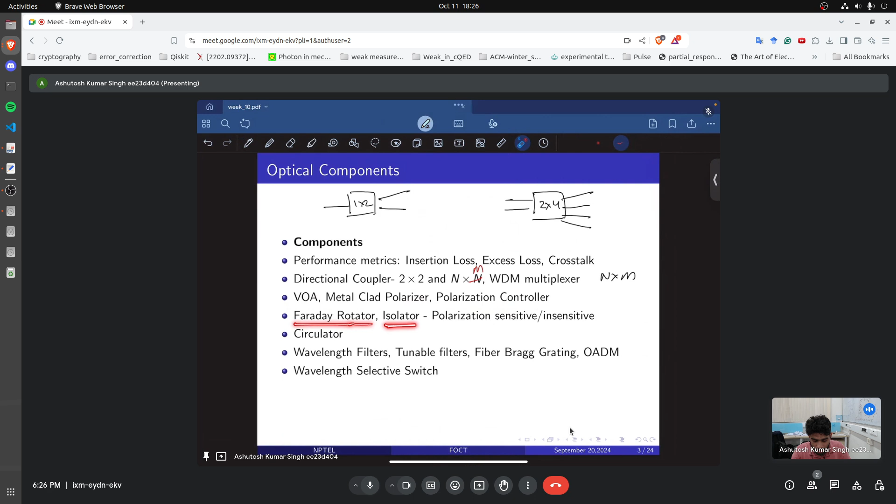Then we looked at how wavelength division multiplexing works. We looked at some other optical components such as the VOA, variable optical attenuator, which can be controlled electrically or mechanically. Then we looked at polarization components such as the metal clad polarizer and the polarization controller. We looked at Faraday rotators and how they are used in making isolators. Professor Deepa talked about both polarization sensitive and insensitive isolators. Then we looked at an important optical component called a circulator. Then there are different kinds of filters such as wavelength filters, tunable filters, and fiber Bragg gratings. OADMs are optical add drop multiplexers, in which you select a particular wavelength. Then we looked at wavelength selective switches, and she also talked about wave shapers.

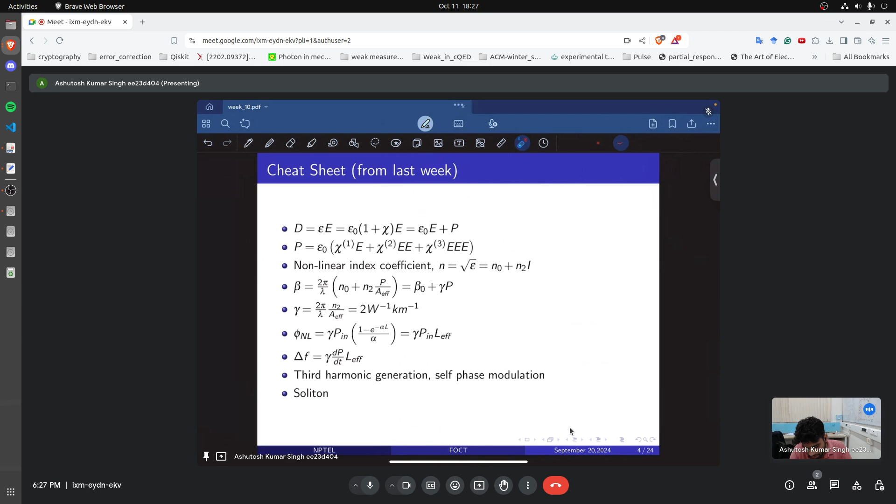Now for the sake of completion, I have added some of the formulas that we used last week. They have just been mentioned here, and we might be referring to them while solving the numericals. Among the formulas we dealt with this week is the formula for cross-phase modulation, the non-linear effect, where this is the chi3 term, because if you remember from last lecture, there is a linear term, the chi2 is absent because the fiber has cylindrical symmetry, and the next non-linear term present is the chi3 term. So we have the chi3 coefficient, and this is how the non-linear polarization looks for omega 1 and omega 2 launched into the fiber.

Then we looked at the four-wave mixing process. This is the phase matching condition for four-wave mixing. We looked at Brillouin scattering; as she mentioned in class, the frequencies are usually 11 gigahertz apart. And then we looked at Raman scattering, and these are the formulas that we'll be using in the numericals.

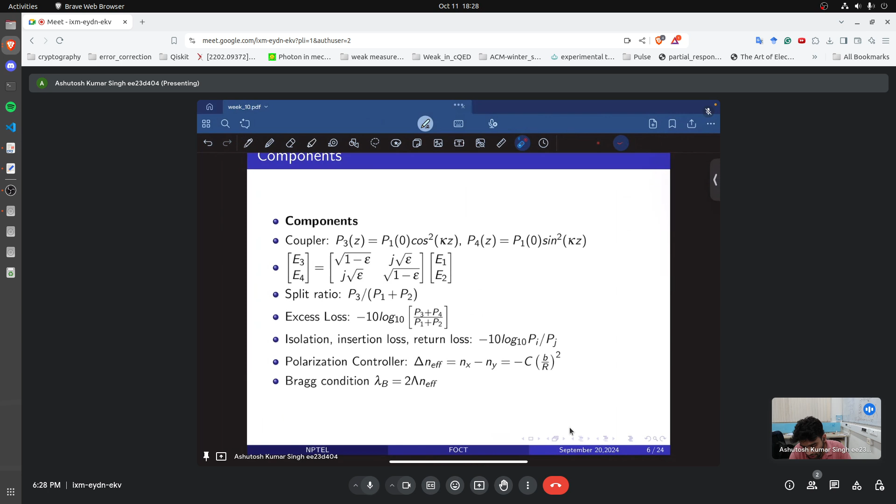Now, for formulas pertaining to the different components that are present, we looked at an optical coupler. If you remember, an optical coupler is just a 2x2 device: port 1, port 2, port 3, port 4. Actually, this is made as it was shown in the slide: you have this fiber going here, and then this is your effective interaction length, and depending on how long this is, the ratios are dependent, and the power at port 3 and port 4 are dependent, given by this formula, and this is the electric field matrix that relates the input to the output.

Now the split ratio is decided by P3 divided by P1 plus P2. Excess loss is the loss in the component that is just because of the material imperfections that are there. And the insertion loss is the ratio of the output power with respect to the input power. The negative sign is there just because Pj is always lower than Pi.

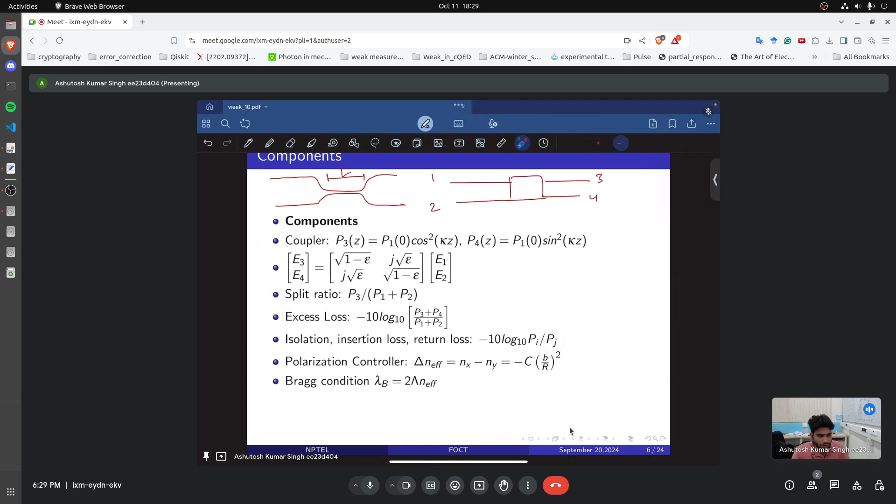And then we looked at how the polarization controller is made by having 3 circular hoops: lambda by 4, lambda by 2, lambda by 4. So with the help of these circular things, we are making a quarter wave plate, a half wave plate, and then a quarter wave plate. We looked at the Bragg condition, which is used in the fiber Bragg gratings after that.

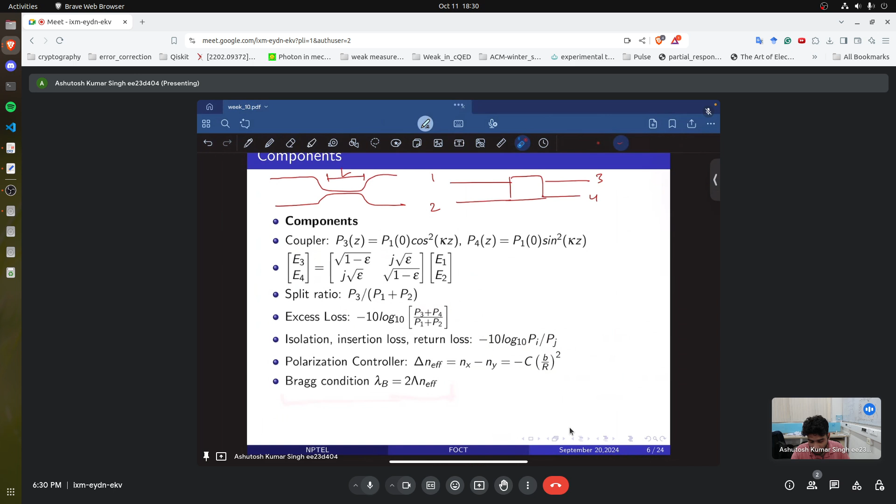Now let us pay attention to the first question that we have from the assignment. The question goes something like: given gR is 1 × 10^-13 meter per watt, and gSBS, SBS is stimulated Brillouin scattering, for a length of 80 kilometers, alpha of 0.2 dB per kilometer at 1550 nm, the SRS threshold is? Now R is Raman, B is Brillouin there.

So now to solve this question, we will have to first take the coefficient which is given in alpha. The loss coefficient is 0.2 dB per kilometer. We have to bring it in the linear scale, and if you remember from the last week, we had 0.2 into 0.23 per kilometer. Let me just pull out my calculator. This would be equal to 0.046 per kilometer. Now from this, we'll try to find the effective length of the fiber, which is given by the formula L effective. Here alpha is the loss, L is the length of the fiber.

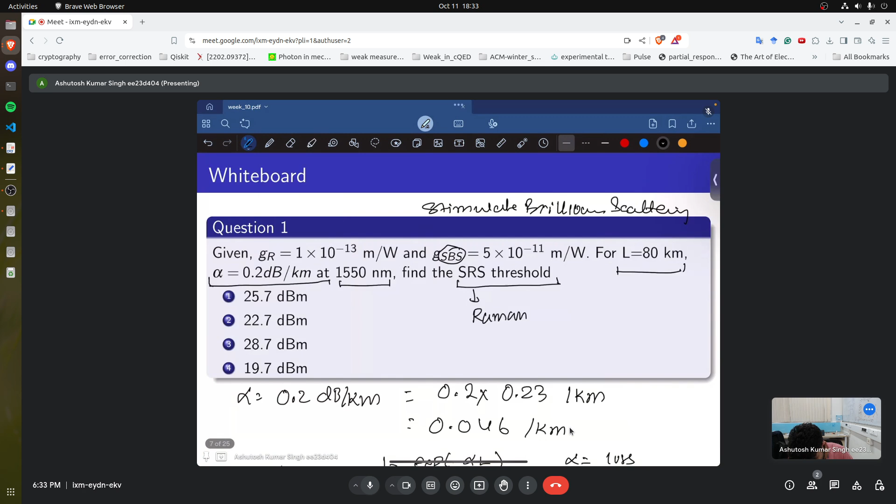Now SRS threshold, if you write it for this, P threshold is given by 16 A effective by gR L effective. Now we still do not know what A effective is. A effective for a single mode 1550 nanometer fiber is about 50 micrometer square. So here, if we just substitute all of these values, the value of gR, 1 × 10^-13.

Let us quickly do this. We are left with 10 raised to the power minus 1, so this becomes 10 raised to the power 2. And the value that we'll get will be 0.377 watts or 377 milliwatts.

Now if I want to convert 377 milliwatts into dBm, P SRS threshold would be 10 log of 377 milliwatts divided by 1 milliwatt, which is 25.76 dBm.

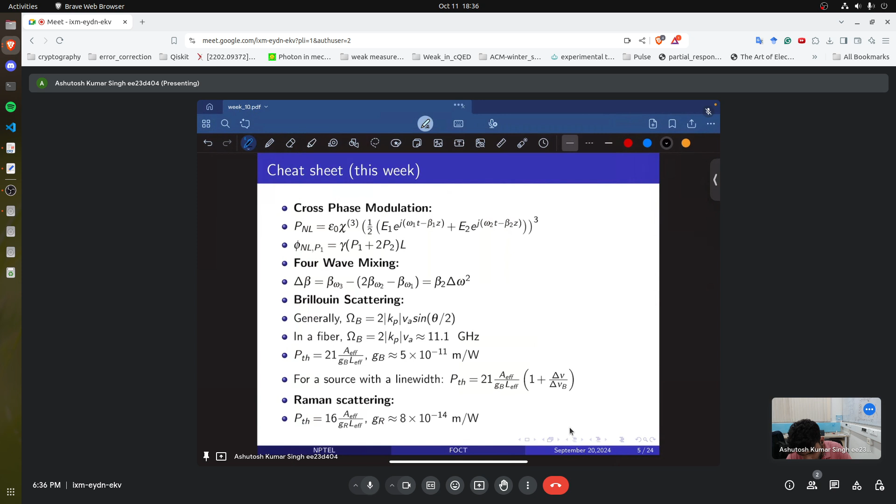Now let us look at the second question. The second question is very similar to the first one, where we have to find the SBS threshold, and B here corresponds to Brillouin. Now to solve this question, we again go back to our formula cheat sheet that was created for us in the slide, and we look at it. For SBS, the factors change slightly, so it is 21 area effective by gB L effective. So let us go back here. So the formula to be used slightly changes.

And we go to the P SBS threshold. This is given by 21 A effective by g. Because we are doing SBS, that's the coefficient that will come here, and this is the same L effective. So 21 into 50 micrometer square. Now g SBS, if we go back to the question, is given as 5 into 10 raised to the minus 11 meter per watt. So we have 5 into 10 raised to the minus 11, and the L effective that we had calculated was 21.2 kilometers.

If we solve all of this, we're left with 21 into 50. Now this is because micrometer is 10 raised to the power minus 6, square is 10 raised to the power minus 12. That is why here instead of 10 raised to the power minus 6 I am writing 10 raised to the power minus 12, and that is divided by 5 into 10 raised to the power minus 11 into 21.2 into 10 raised to the power 3.

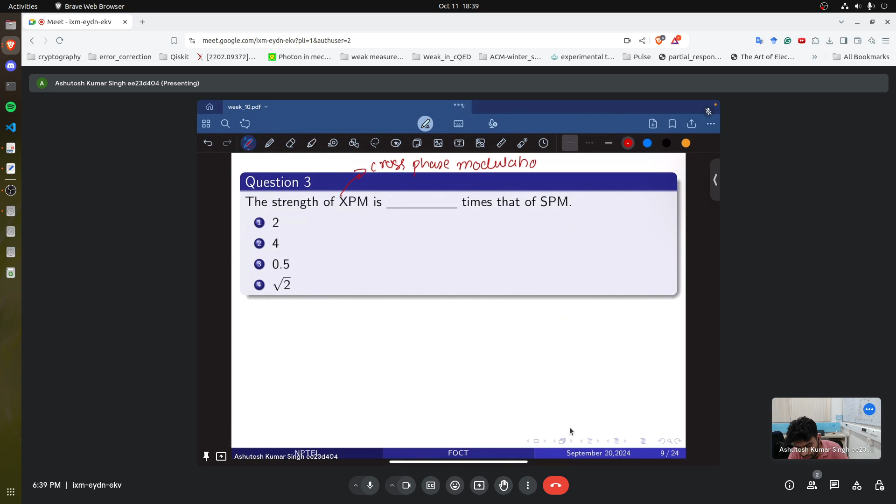The next question is, in this week we had studied, the X here represents the cross, so this is the cross phase modulation, and this is the self phase modulation. Now the question is asking the strength of X phase modulation is how many times the self phase modulation. So the first question is, is it greater or is it lower? You remember that the self phase modulation was one wavelength moving into the box, and then because of the changing intensity inside and the changing refractive index, the behavior was changing.

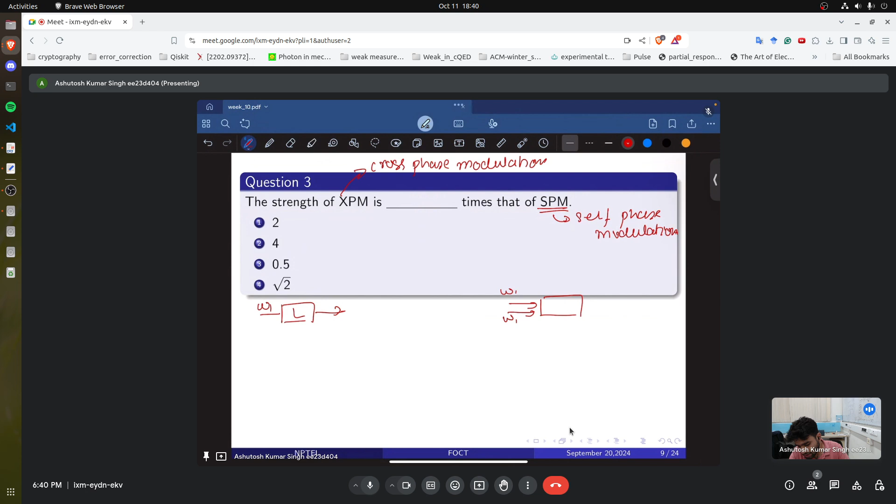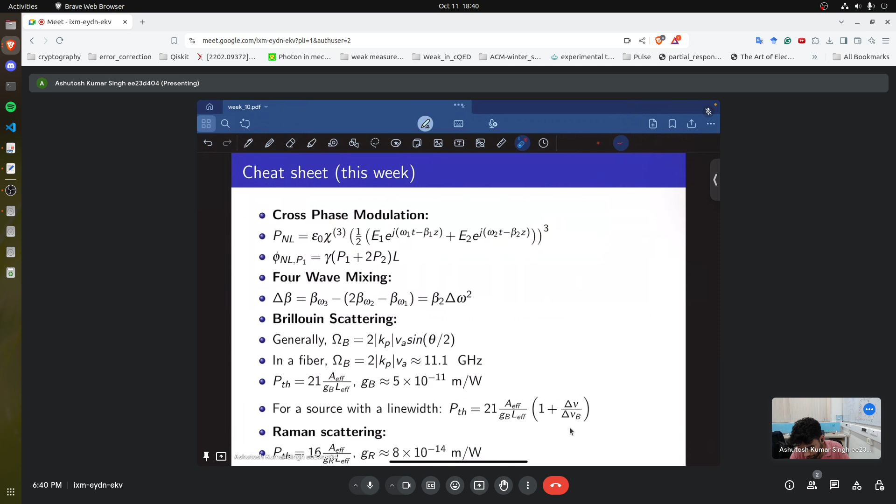But for cross phase modulation, we were inputting two wavelengths, omega 1 and omega 2, and then whatever was happening inside this box. This is captured here in the notes by the formula for cross phase modulation. You will see here that we have omega 1 and omega 2, two lights coming in. This is a cube of it because this is the third order factor. Now when you expand that third order factor, it is a normal algebraic exercise where you do a plus b whole cube,

and then you will be left with terms such as 3 E1 square E1 e raised to the power j omega 1 t minus beta 1 z, and there would be a second term, shown in Professor Deepa's slides as well, where there is 6 E2 square E1 e raised to the power j omega 1 t minus beta 1 z. So the frequency omega 1 is being affected by the electric field of the first and the electric field of the second, and you see that the ratio here is 2 times. So the strength is twice that of the SPM.

Now let us look at the next question. A coupler is to be constructed from two fibers by fusing. This is the same exercise where two fibers were brought together and twisted such that some overlap was happening between the electric fields. Given the coupling coefficient K of 2 per meter, what is the minimum coupling length required for the coupling ratio of 50-50? You have P1, P2, P3, P4. K is given to us as 2 per meter. What is the coupling ratio?

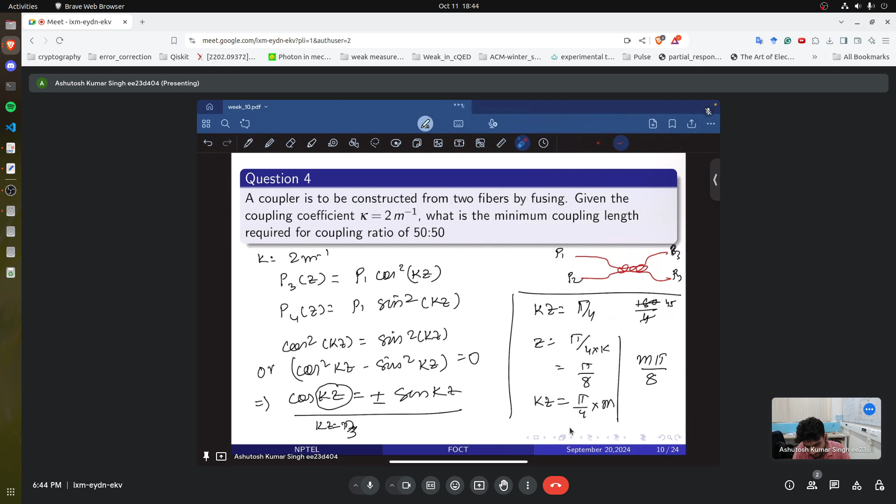Now the fifth question is, which one of the below components can be used as a WDM demultiplexer to extract a single channel? So WDM here is wavelength division multiplexer. Now before we get into that, WDM is further classified into two kinds, the first is dense wavelength division multiplexing.

And in this, the channels are separated by 50 gigahertz band, and this is defined by the ITU grid, and this is what Professor Deepa was talking about. It starts somewhere from 1530 to 1570 nanometer, and there are 80 channels. So 80 channels are there in DWDM. There is another type which is coarse wavelength division multiplexing. This is DWDM and this is CWDM.

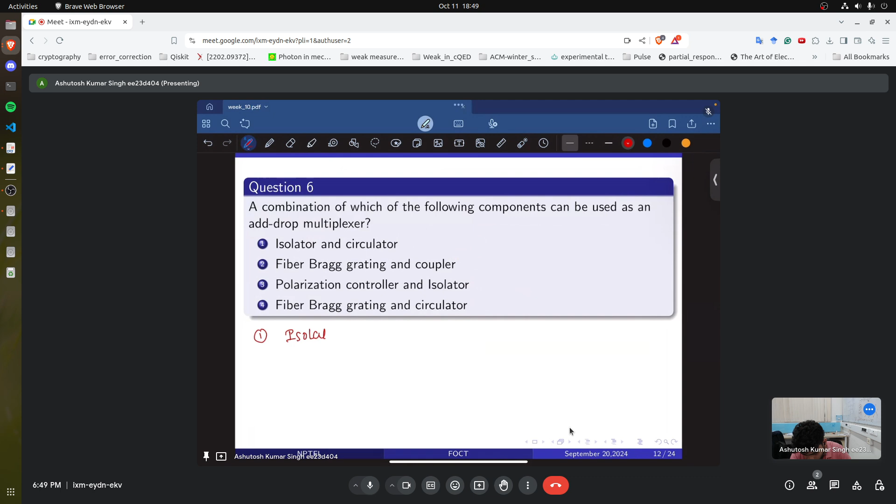Isolator allows for unidirectional flow of light. So clearly this cannot function as an add-drop multiplexer, because even if we come up with a clever scheme to drop something, we cannot add it back into the network. That means, let's say I have a network here and I am a user. Let's say I put an isolator here and then some complicated scheme of circulator.

I put a circulator here and then let's say I put an isolator. So whatever is going here from port 1, it will go to port 2 and it will go forward, but whatever is coming back, the isolator will not allow it. So this is clearly not the answer.

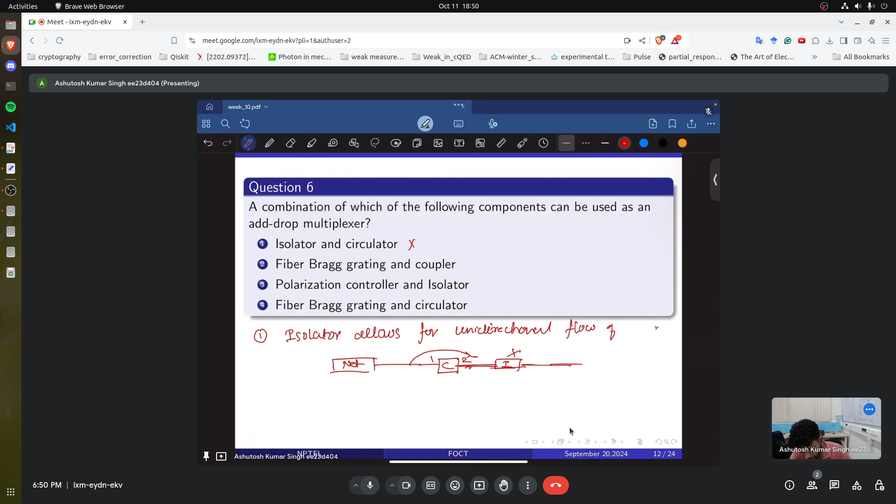Now let us look at fiber Bragg grating. So we had discussed what a fiber Bragg grating was. It was just a strip of fiber and certain sections of it were illuminated by different lights, so the refractive index was changing periodically. And because of this feature, if you feed a wide enough spectrum to this, on the output you'll have the spectrum and then a narrow part of it, depending on the Bragg grating, is reflected.

So this is input and this is transmitted, and what is reflected would be something like this. Hold on, sorry. What is reflected would be something like this. The combination of these two graphs would complete this graph, barring the insertion loss. So it does look like the fiber Bragg grating is the component that will help us drop and add the channel, and there is no sense of directionality here.

But the problem is a coupler is not the right solution. So let's say I have an FBG. I will draw this as fiber Bragg grating. Let's say I put a coupler, a 2x2 coupler, and I've put an FBG. Whatever is going this way, I'll be able to have it. This will reflect a certain wavelength and it will come here, but it is not going in the forward channel.

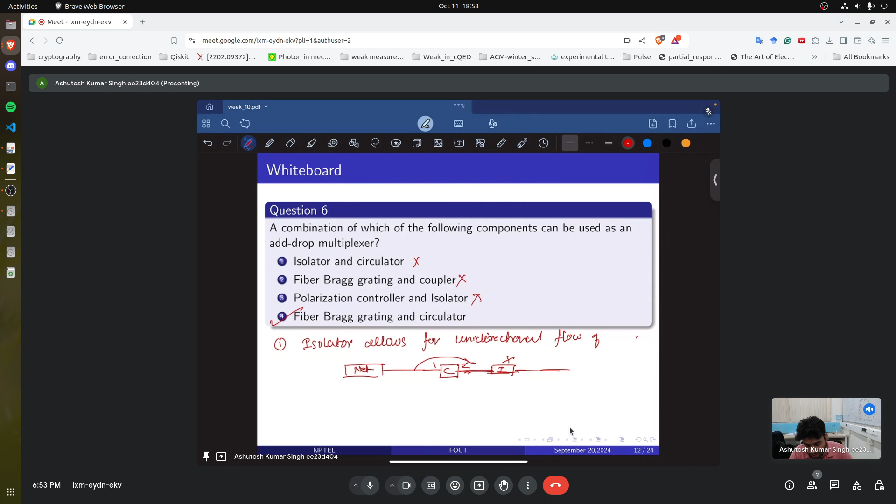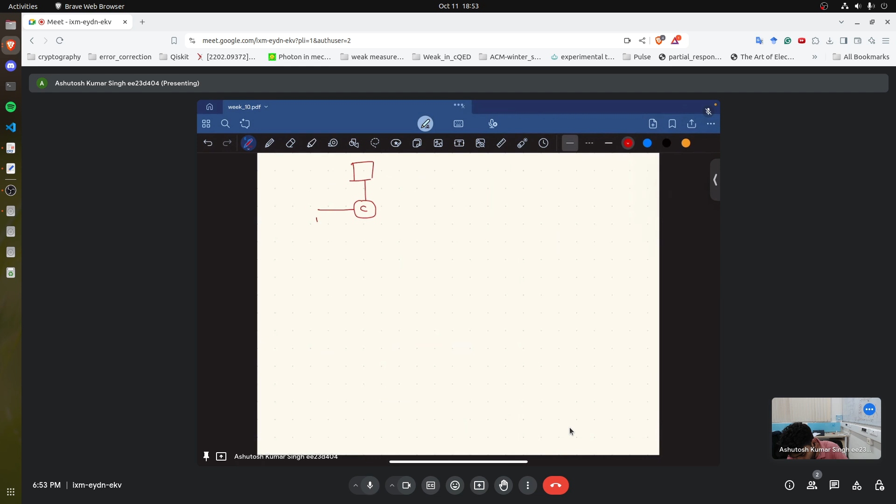So by elimination, we know that this would be the answer, but let us see how this can be constructed. Let us say I have a circulator, port 1, I put the FBG here, and this will be port 3, this will be port 2. Now let us inspect what is happening. This is lambda, this is power, and it's a wide spectrum that is input in port 1. At the fiber Bragg grating it will take this entire thing and then transmit this part of it, and it will reflect this.

Now what happens to this reflected thing? This goes here, and remember, reflected goes here. So in this way, if we had a fiber line, and I put a circulator here, ports 1, 2, 3, and there was an FBG in this case, and this went on, and this was 3.

So if TX was transmitting a wide wavelength, the entire thing will go from 1 to 2 at the FBG. This will transmit the entire thing, dropping a wavelength, and whatever is reflected here will come in. And in this way, we will be able to add or drop one wavelength. So the correct answer is the fourth one. Now let us look at question number 7.

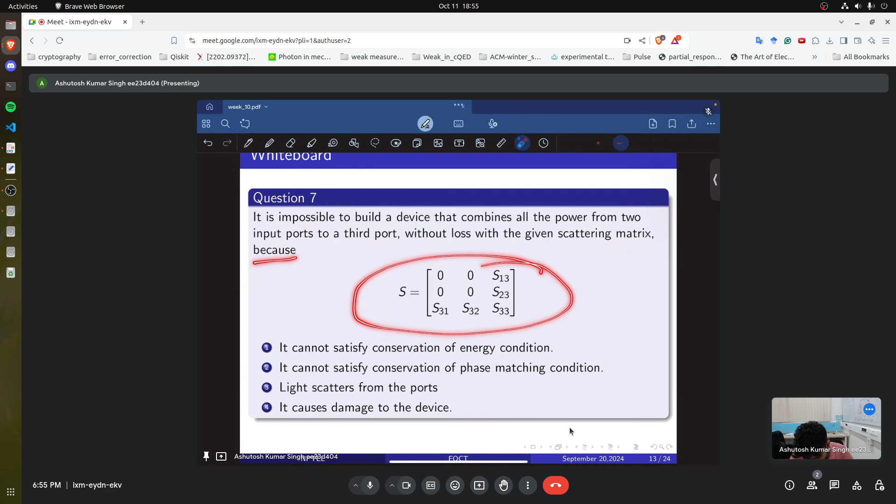Question number 7 is: it is impossible to build a device that combines all power from 2 input ports to the third port without loss with the given scattering matrix. We have been given this matrix, and it is asking for a reason. So whenever the scattering matrix is given, think of it this way. If we are assuming no loss, that would mean the scattering matrix multiplied by its adjoint should give me the identity.

So if I have S given here, which is given by 0 0 S13, 0 0 S23, S31 S32 S33. Now what energy conservation essentially means is that S S dagger should be identity,

and if I have these matrices written out, and the complex conjugates of these numbers, now if I just carry out the multiplication here. How do you multiply matrices? Row and column, row and column. These would give me the first element. So this would be S3.

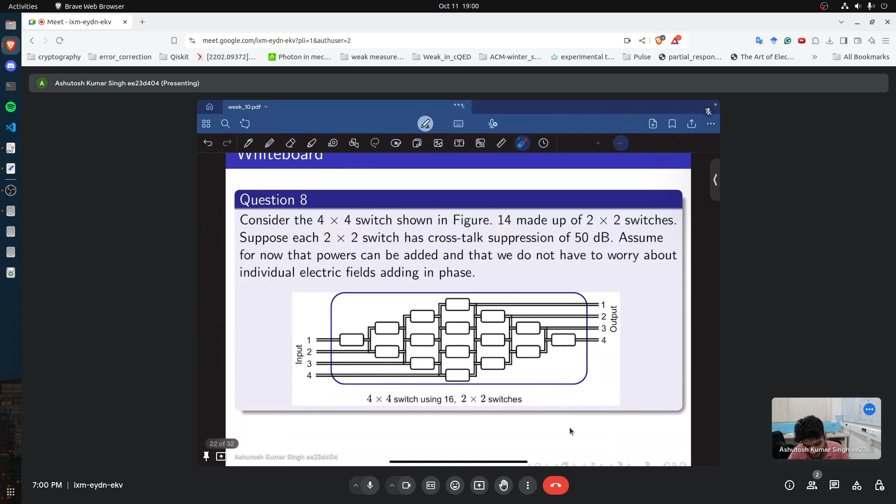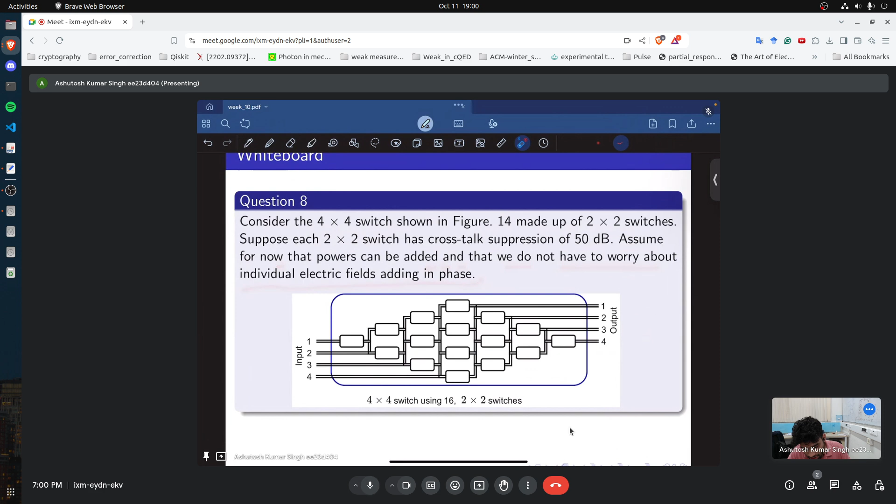Now let us look at the next question. Consider a 4 cross 4 switch shown in figure 14, made up of 2 cross 2 switches. Suppose each 2 cross 2 switch has a crosstalk suppression of 50 dB. Assume for now that powers can be added and that we do not have to worry about individual electric fields adding in phase. Because we do not have to assume that, this makes our life very simple.

Now we have a 4 cross 4 switch with a crosstalk suppression of 50 dB. What is 50 dB in the linear scale? 50 dB is 10 log P out by P in, and because this is suppression, it comes with a negative sign, which essentially means 10 raised to the power minus 5. So the leakage from each channel into the other is 10 raised to the power minus 5.

That means if you have 1 2 3 4 and 2 3 4, if light is going on in this, 10 raised to the power minus 5 from each will be coming here. If this is happening in all 4 cases, 1 would be the correct one, because I do not assume any leakage there. So let us take this specific line as an example. If this leakage is present in all the circuits, the incorrect optical power getting there would be 3 into 10 raised to the power minus 5.

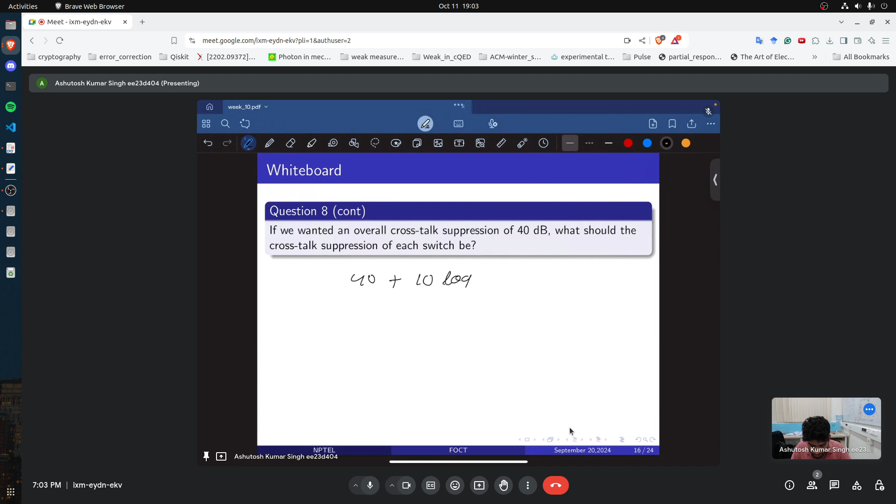If you want an overall crosstalk suppression of 40 dB, what should be the crosstalk suppression of each switch? We know there would be a degradation of 10 log 3, and this gives us 44.7 dB. So if we want an overall suppression of 40 dB, we only need a crosstalk suppression of 44.7 dB for each switch instead of the 50 shown in the previous case.

Now let us look at the next question that we have in our line: a product sheet for a 2x2 single mode biconical tapered coupler. This is the kind of coupler that we have talked about. With a 40-60 splitting ratio, the sheet says that the insertion losses are 2.7 dB for the 60% channel and 4.7 dB for the 40% channel. If the input power P0 is 200 microwatts, find the output levels P1 and P2.

Now, we know that the insertion loss is minus 10 log P out by P in, or you can have it as 10 log P in by P out. All the numbers have been given to us: 10 log10 of 200 times 10 to the minus 6 watts, and let us say I want P0 to be calculated in milliwatts, and this has been given to us as 2.7.

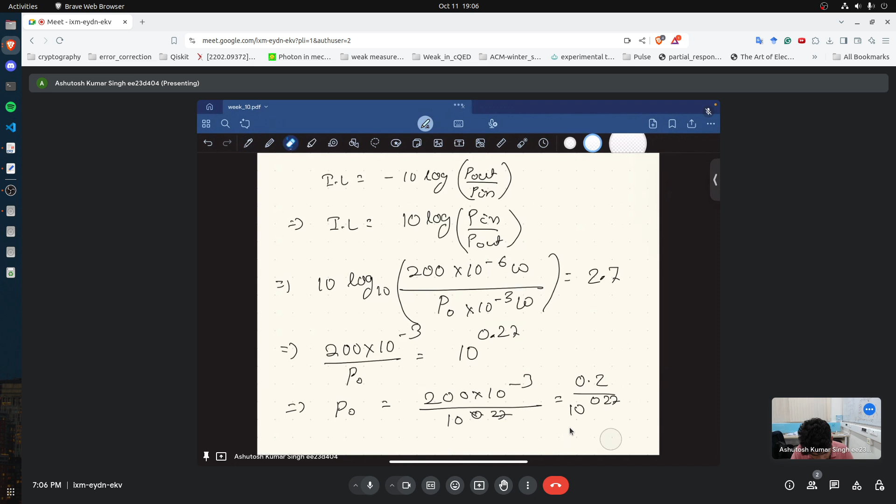So this comes out as 200 into 10 raised to the power minus 3 divided by P0 is equal to 10 raised to the power 0.27, and 200 into 10 raised to the power minus 3 is just 0.2, divided by 10 raised to the power 0.27 is 0.1074 milliwatts, and that corresponds to 107.4 microwatts.

Similarly, we could attempt for the other side as well, but I don't think that is required in this case. For this I attempted the 60% side. You can attempt the 40% side and see if you are arriving at this number or not. Find the excess loss of the coupler. Now I know the correct answer, I'll utilize that. P1 is 107.4 microwatts. From the option, P2 is given as 67.8 microwatts.

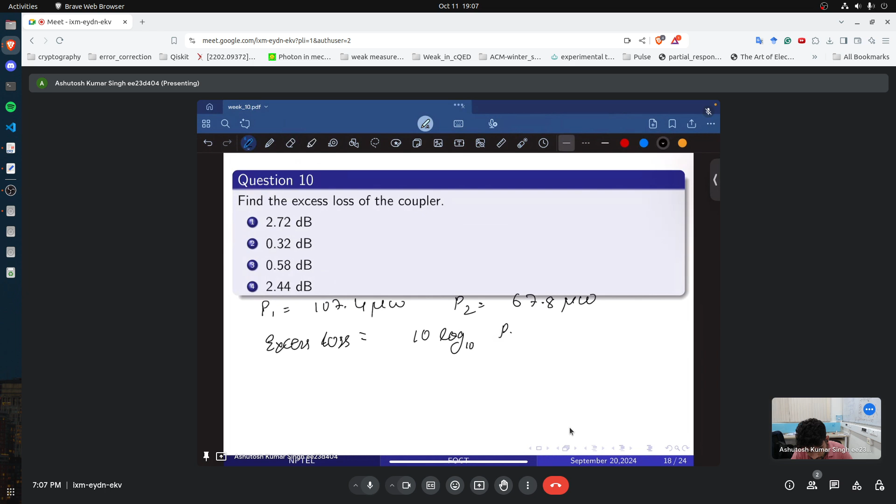Now excess loss. Excess loss is whatever is the optical loss of the component that cannot be retrieved in any other way, and that is given by 10 log base 10 of P input divided by P1 plus P2. Everything is in microwatts, so it's simpler. We were inputting 200 microwatts of light, and we got 107.4 on one and 67.8 on the other.

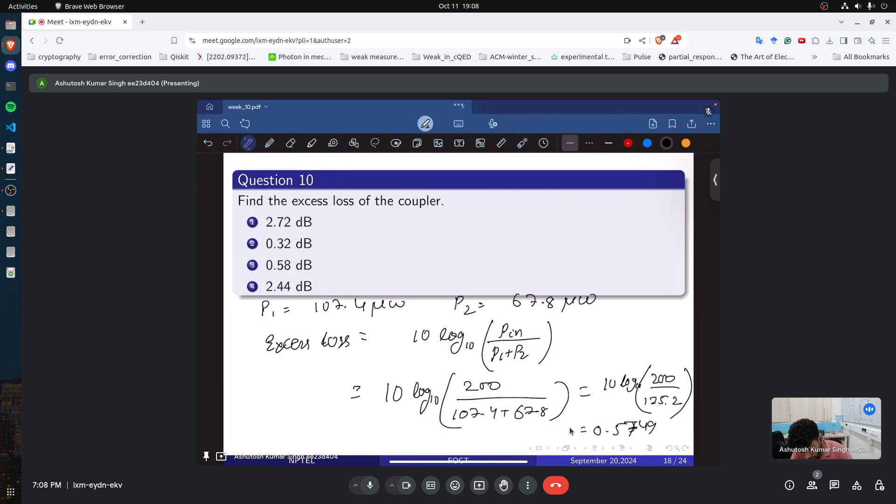This equals 10 log10 of 200 divided by 175.2, and this is equal to 0.5749. The closest answer here is 0.58, so that is the correct one.

Now let us consider two periodic filters, one with period f1 and the other with period f2. Assume them to be integers. In other words, the first filter selects frequency mf1 where m is an integer, and the second selects mf2. The resulting cascaded filter is periodic, and the period is given by. Now this is kind of an intuitive question.

If I have one filter that selects these wavelengths, and let's say I have another filter that selects every other wavelength, what are the wavelengths that will be transmitted if I cascade these two? This, and how did I arrive at this number? This is a basic mathematical function called least common multiple. So the answer for this is least common multiple.

Now the next one makes my point more clear. If the periods of two filters are 500 gigahertz and 600 gigahertz, then the cascaded structure will be periodic with a period of. Now these are not similar, right? Let's say this is my 500 gigahertz, and I take the other one as my 600 gigahertz. From the beginning it would be slightly off here, and slightly off here.

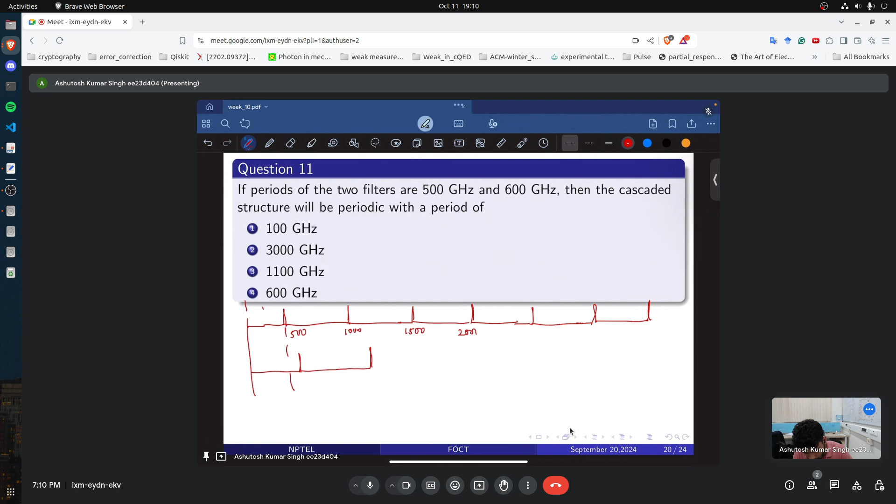If we start numbering, this would be 500, 1000, 1500, 2000, 2500, 3000, 3500, and for the other, 600, 1200, 1800, 2400, 3000. So you see, if I cascade these two filters, only this is being picked up. And how did I arrive at this number? The LCM of 500 gigahertz and 600 gigahertz is 3000 gigahertz, because that is the least common multiple of these two numbers.

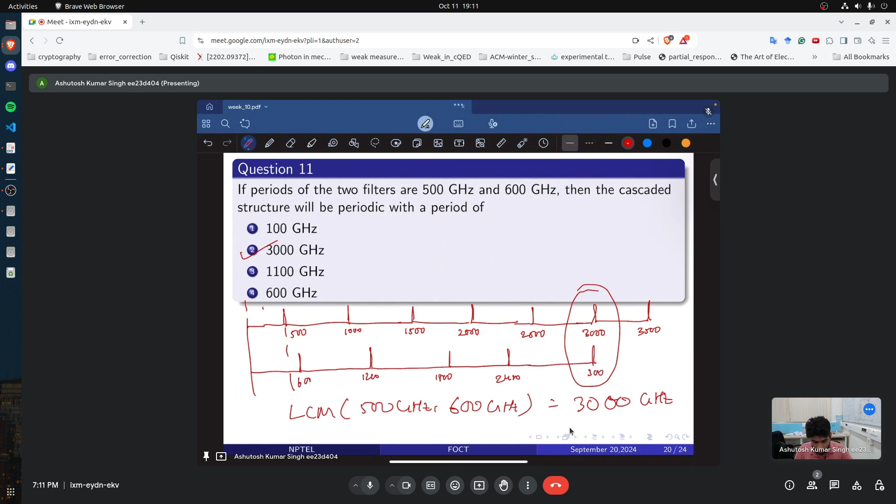So even if the first one allows this frequency, the second one would not allow it, as there is no light for the second one to allow at this point. So that is why both of them have to overlap for them to transmit together.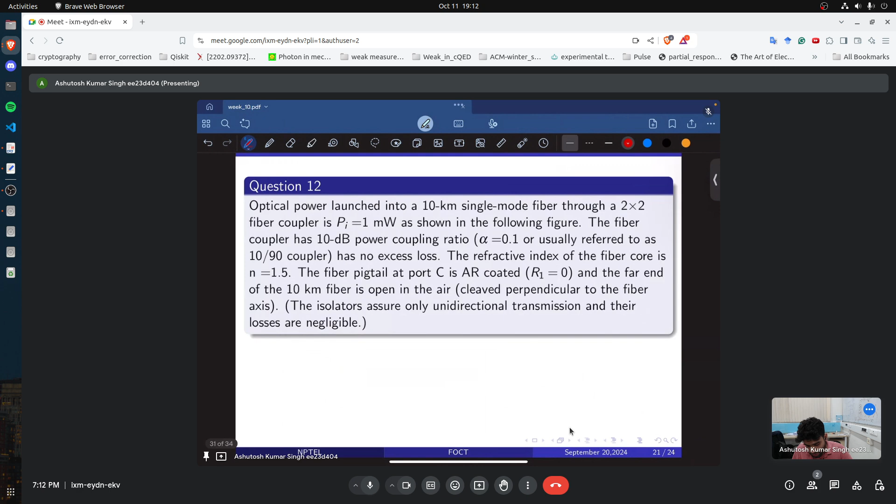Now let us look at this question. Optical power launched into a 10 kilometer single mode fiber through a 2x2 coupler is 1 milliwatt, as shown in the following figure. The fiber coupler has a 10 dB power coupling ratio, alpha equal to 0.1, we usually refer to it as a 90-10 or 10-90 coupler, and has no excess loss. So this is the ideal case. The refractive index of the fiber core is 1.5.

I seem to have accidentally cut the call off. Let me log back in.

Now let us look at question number 12. We have been given optical power launched into a 10 kilometer single mode fiber through a 2x2 coupler is 1 milliwatt, as shown in the following figure. The fiber coupler has a 10 dB power coupling ratio, or as we call it, a 90-10 coupler or a 10-90 coupler. So one side takes 10% and the other side takes 90% of the input, and it has no excess loss. That means this is an ideal case.

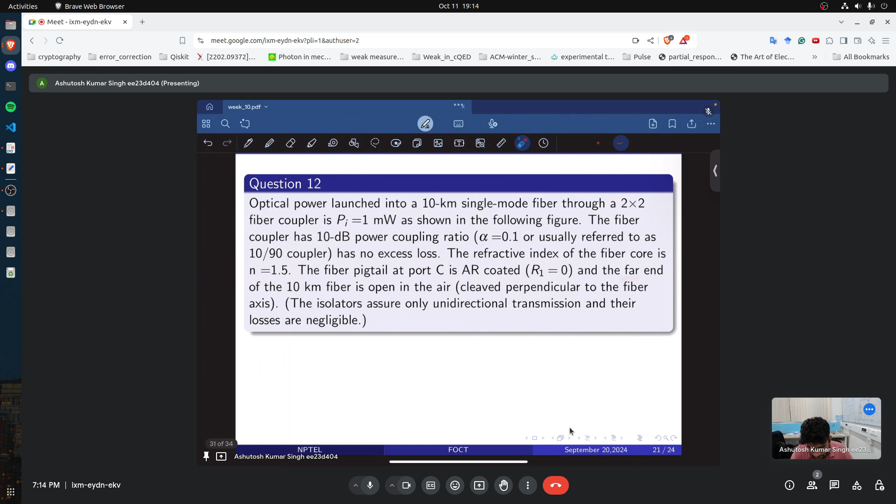Okay. So what is happening here is some power is being launched here, and the power in this case is 1 milliwatt. So we have 1 milliwatt power being launched here, goes through the isolator, to port A, and because this is a 90-10 coupler, assuming 10% goes here and 90% goes here, and because this is anti-reflection coated, there is no reflection from the facet.

But because this is open to the air, this side the refractive index is 1.5 and this side is air, which has a refractive index of 1. So there would be some reflection here, and that would go back. Then it would again go 90% this way and 10% this way, and whatever is output here. So let us look at the first question. Neglecting all fiber losses, what is the optical output P naught?

So this can easily be calculated. Let us see the reflection. One thing to note here is, think of it this way: A to C is 10% and A to D is 90%. So along the same side there is 10% transmission, along the opposite side there is 90% transmission. So while going back, along the same side there would be 10% transmission, and along this side there would be 90% transmission.

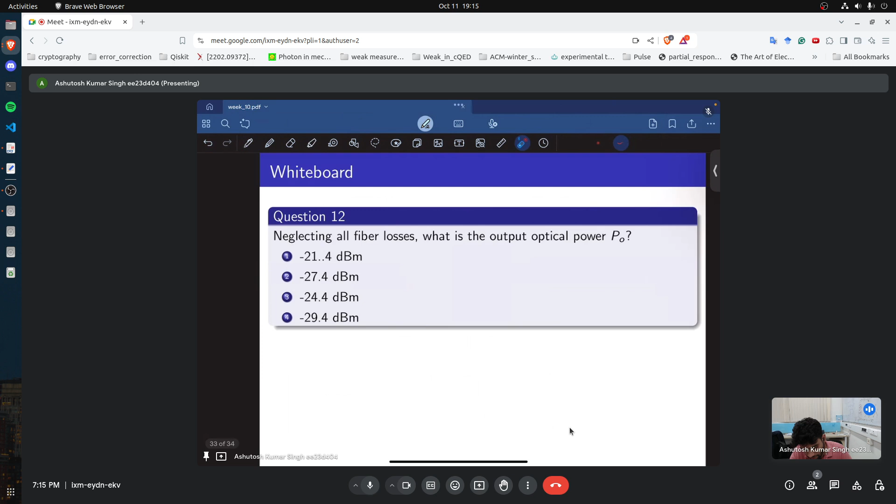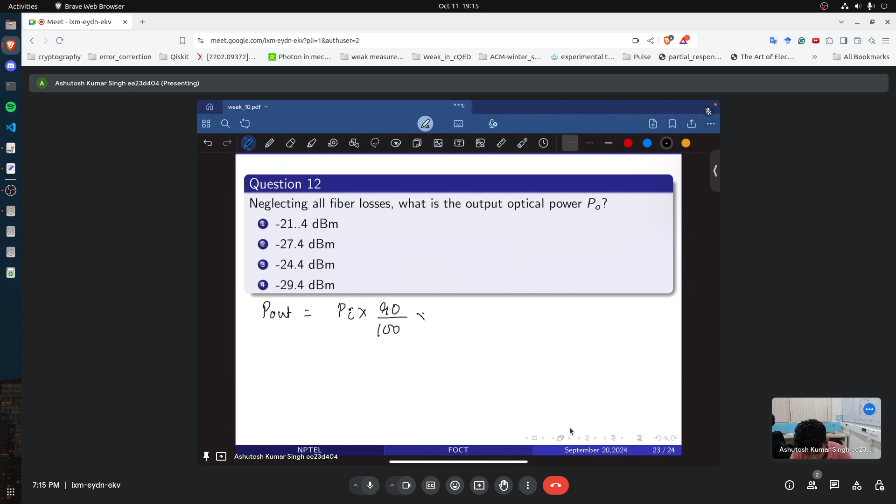So the way we will calculate is P output is whatever is my P input. For the first side, 90% goes here, then whatever is my reflected power, and then the 10% goes through. That means I need to find the P reflected, or at least the reflectance, which would be given by Fresnel's law, which is (N1 minus N2) divided by (N1 plus N2) whole square, where these are refractive indices. So (1.5 minus 1) divided by (1.5 plus 1) whole square is 0.5 over 2.5 squared. This is 1 over 5, so it is 1 over 25.

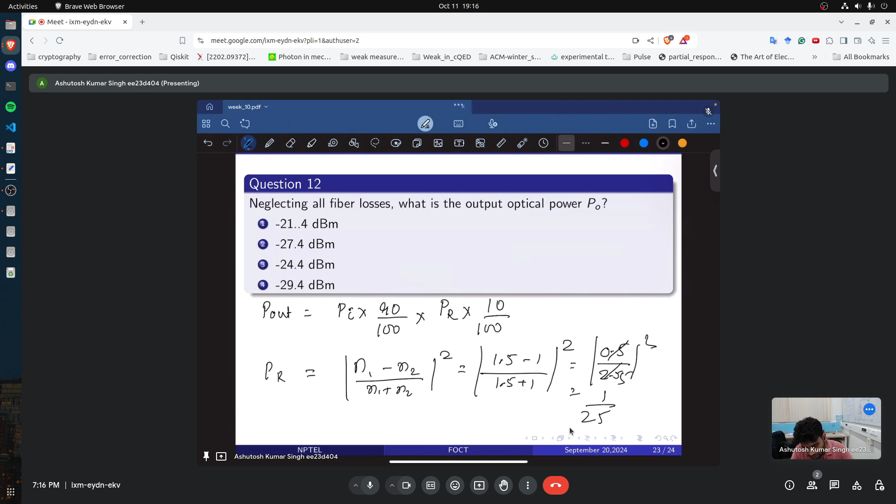And that would give me the answer as P out is P in times 90 by 100 times 1 by 25 times 10 by 100, and my P in was 1 milliwatt. This is 9 divided by 2500 milliwatts. And when I do it in log scale, this would be 10 log, and this is minus 24.43 dBm. So the closest answer here is approximately minus 24 dBm.

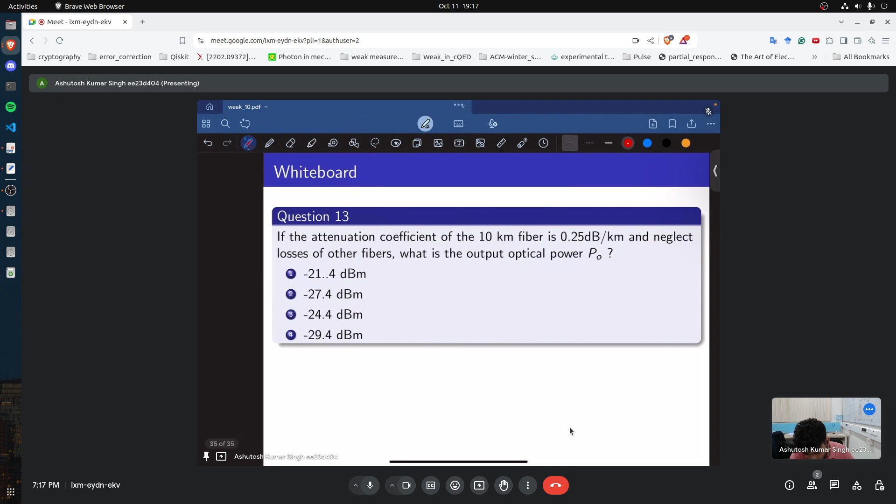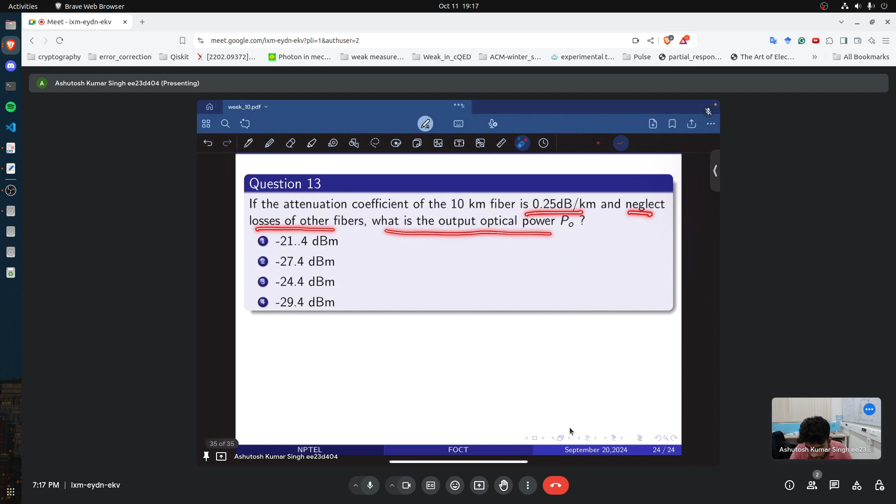Now let us look at the next case. If the attenuation coefficient of the 10 km fiber is 0.25 dB per kilometer and we neglect losses of the other fiber, what is the optical output? Now let us see where the fiber was actually added. The 10 km fiber is added here. That means the light is going 10 km this way, and whatever light is reflected comes back this way. Now the benefit of working in a dB scale is that all the losses just become additions and subtractions.

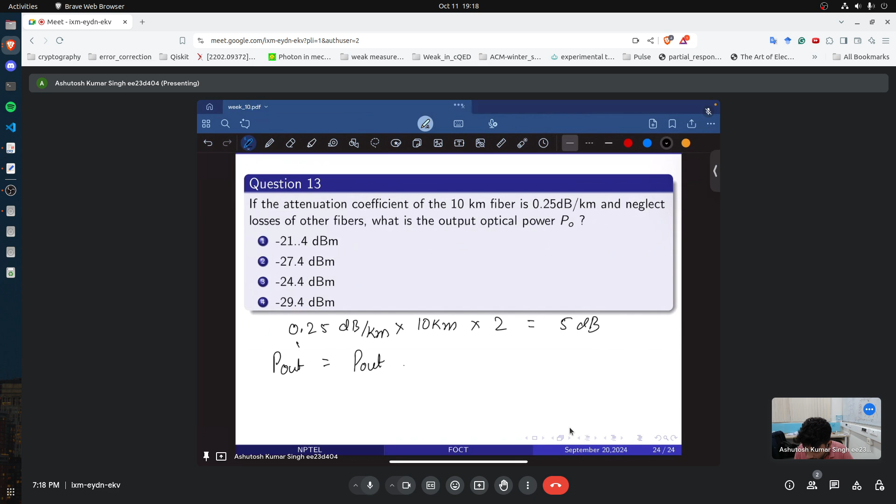So if we have 0.25 dB per kilometer for a 10 kilometer length traveled twice, that is just 5 dB loss. And because I already know, my P out prime would be P out from the previous case, and I will subtract another 5 dB from it. So in the last case we had P out as minus 24.4. Then I subtract 5 dB from it, and this is minus 29.4 dBm, which is this case.